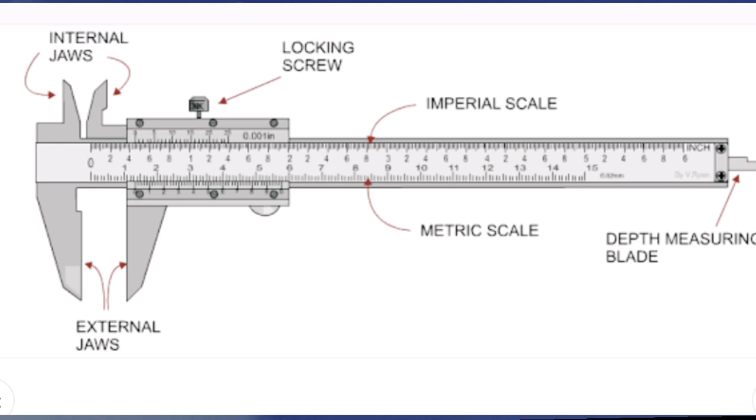Now, inner or inside jaws we used to call them, or sometimes we call them the ears of the vernier caliper, which is used to measure the inside or inner diameter of an object. Vernier scale is having, as I have told you, two main sets of jaws, fixed jaw and one is movable jaw.

So movable jaw, we can move it with the help of the screw, and that fixed jaw is connected with the main scale. That main scale is the common scale that you are using. Its least count is 1 mm. To fix any object between the jaws, we used to move the movable jaw with the help of screw.

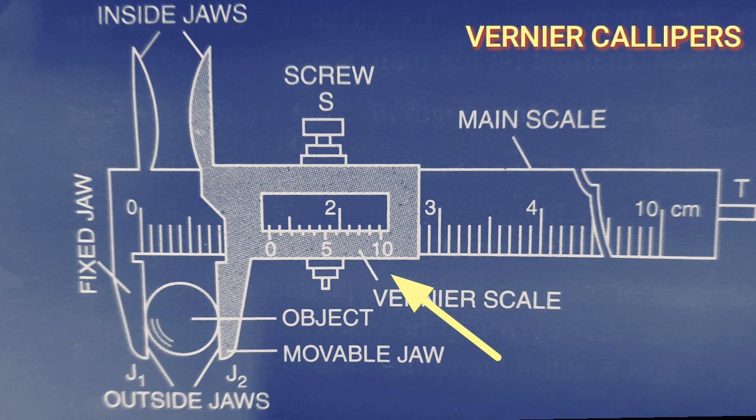And here at the end, T, that is the tail, which comes out when we move the vernier scale. Tail is used for measuring the depth of a cylinder. The least count of the vernier scale is 0.1 mm.

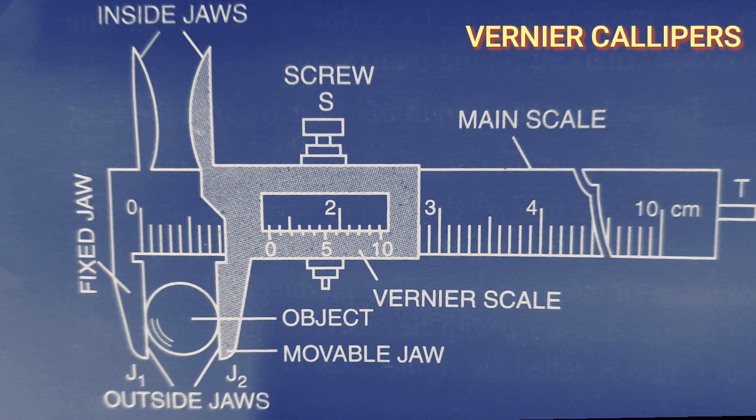The vernier scale is having 10 divisions on it, which divides the least value of the main scale in 10 equal parts. So vernier caliper altogether gives the value of 0.1 mm accurate value. So first of all, when we are going to use vernier caliper, we must know the least count

of vernier calipers. So for that, we are having a formula, that is the ratio between the value of one main scale division upon total number of divisions on the vernier scale. So most commonly we are going to have one more formula, which is the value of one main scale division minus the value of one vernier scale division. It is also called vernier constant.

Let's see how to take the reading of vernier calipers. Here we are having the formula: main scale reading plus vernier scale division multiplied by least count, and subtract error with the proper sign. So here we are having another diagram how to take main scale reading. Now see, the 0 of the vernier scale coinciding with the main scale will give you the value. Now vernier scale division, which is coinciding with any division of main scale.

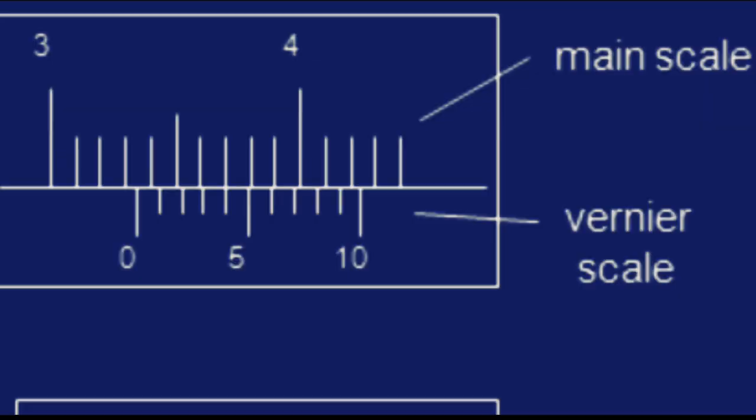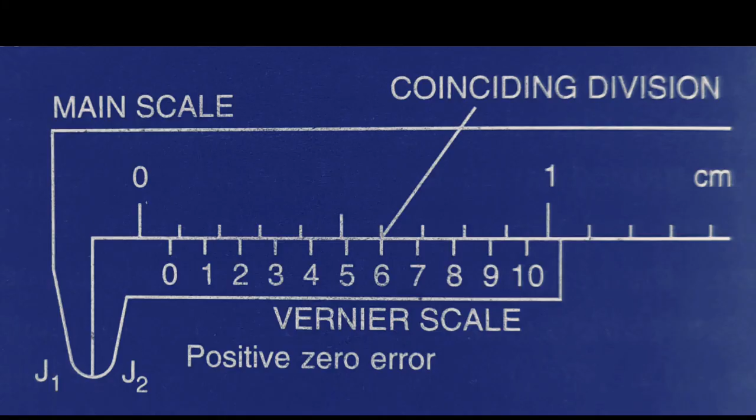Let's see here another diagram which shows both main scale division and vernier scale division. Main scale you can see and the vernier scale division. Now zero error in vernier caliper. If the 0 of the main scale and the 0 of vernier scale do not coincide with each other, then there is error. Make sure that both the jaws J1 and J2 are coincided while looking for the error.

Now two possibilities of error if the zeros are not coincided. First, positive zero error, and second one, negative zero error. In this diagram, you can see the zero of the vernier scale is to the right side of the zero of main scale. So this error is considered as positive zero error. And how we have to rectify this error?

For this, you have to follow a procedure in which you have to see the coincided value of the vernier division. According to this diagram, you can see the sixth division of vernier scale is coinciding with the main scale. So the error will be equal to the sixth division of vernier scale. You have to multiply it by the least count, that is 0.1 mm. So the positive zero error will be equal to 0.6 mm.

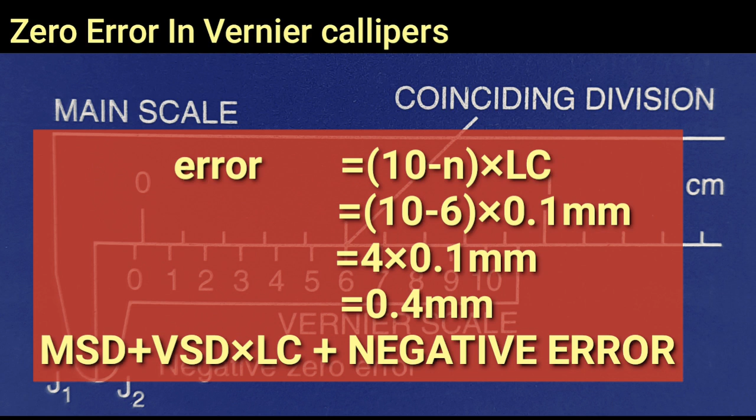So again 6 we will not take. In this case, the coinciding value we have to calculate by 10 minus 6, that will be equal to 4. So it is different from the positive error. You have to remember this. Now you have understood through this video how to use a vernier calipers and how to remove the error, if any, the vernier caliper is having.

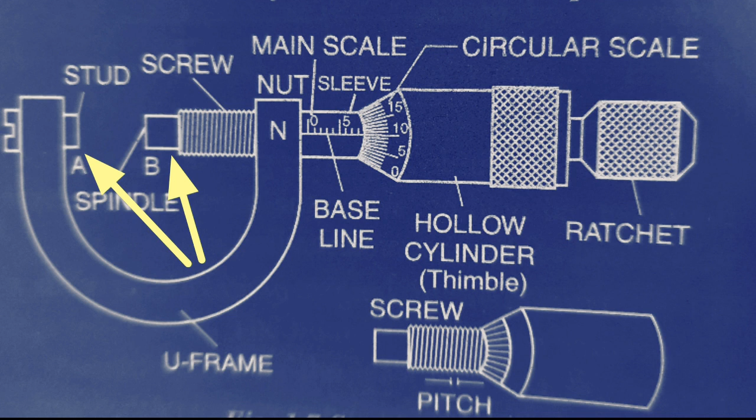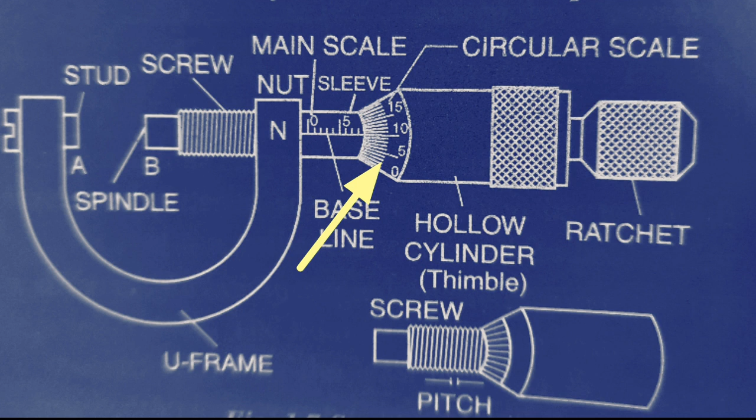First, ratchet. Ratchet is used to advance the screw by turning it till the object is gently held between the stud and spindle of the screw. Second part, sleeve, to mark main scale and baseline. Thimble, to mark circular scale. Main scale, to read the length correct up to 1 mm. Circular scale helps to read length correct up to 0.01 mm.

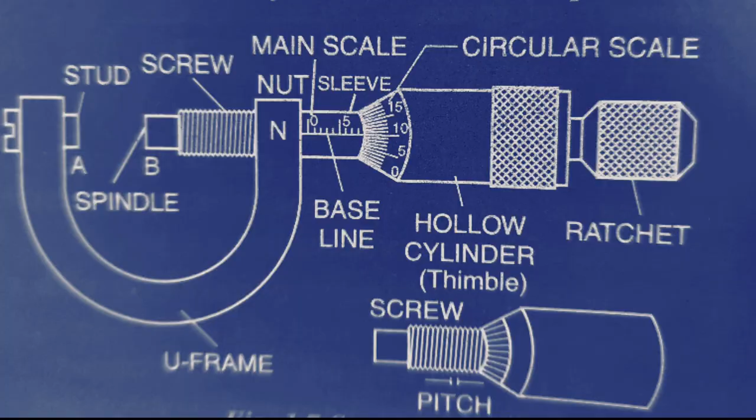In the diagram, you can see the pitch is mentioned with the screw. Pitch is the distance between two consecutive threads of the screw. Pitch of the screw gauge can also be obtained by one complete rotation of the circular scale. The linear distance moved by the screw on the main scale will give you the value of the pitch. Now, least count of a screw gauge: LC is equal to pitch upon total number of circular scale divisions.

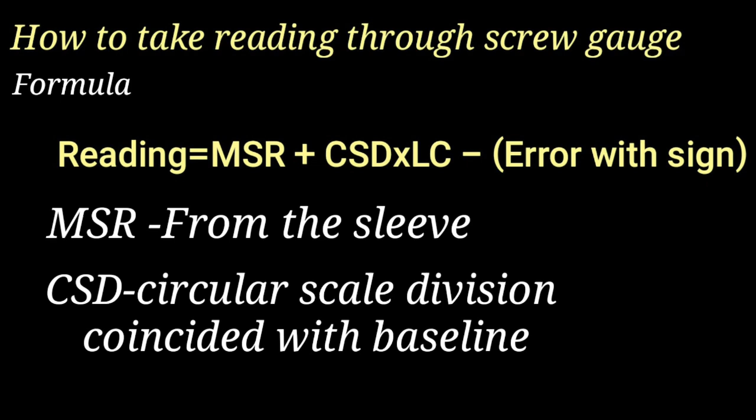Now, how to take reading through screw gauge? Here we have the formula: reading equals MSR, that is main scale reading, plus circular scale division multiplied by least count, minus error with proper sign. Main scale reading we get from the sleeve, as you have seen in the diagram. Circular scale division is the coincided value of the circular scale with the baseline, that will give you CSD.

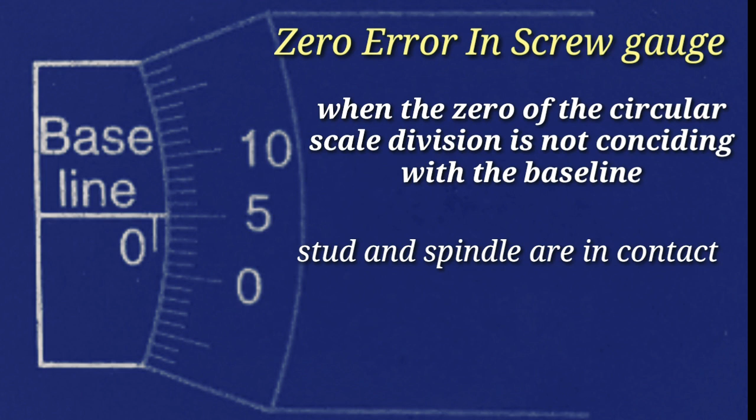Now, zero error in screw gauge. When the zero of the circular scale is not coinciding with the baseline, when the stud and the spindle are in contact, then there is error in the screw gauge. When the zero is below the baseline, it is positive error. The positive error can be removed as we have done in vernier scale. Similarly, we have to subtract the positive zero error from the screw gauge reading. Here you can see the formula.

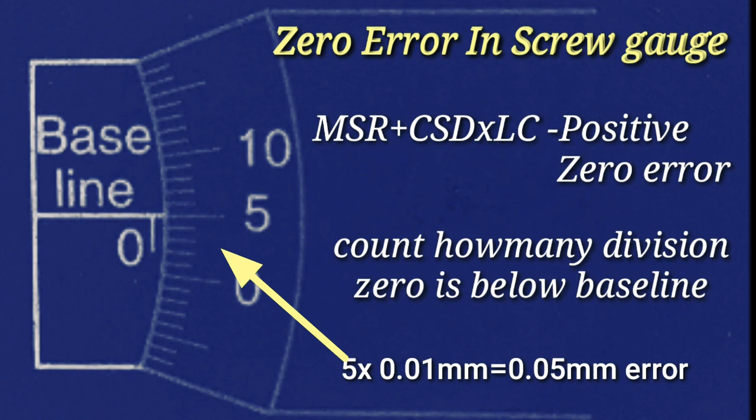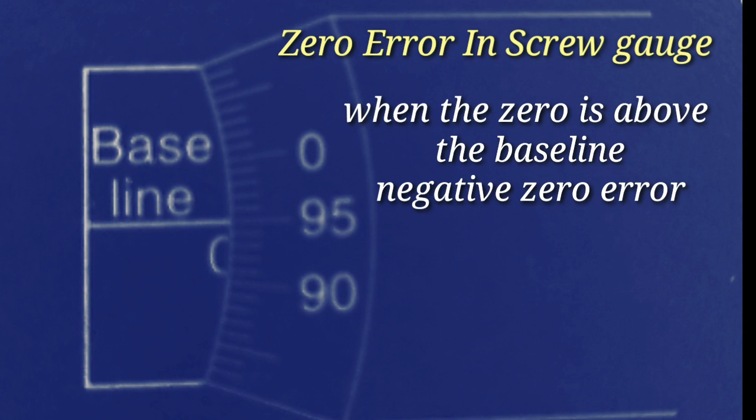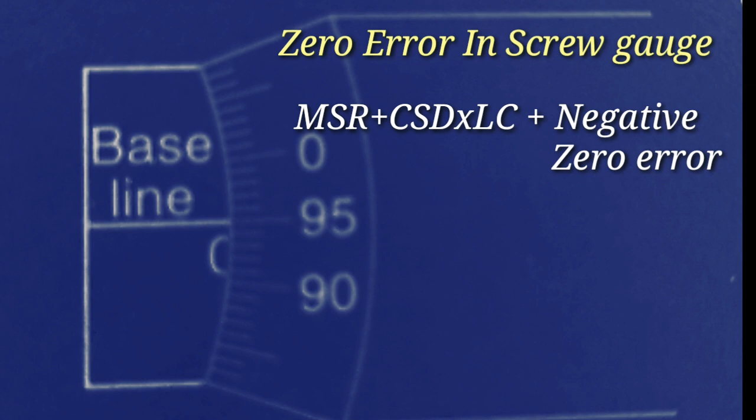And when the zero is above the baseline, negative zero error will be there. Same as the vernier scale, we have to add the error after calculation of the negative zero error. In this case also, just remember this point: you have to check how many divisions the zero is above the baseline.